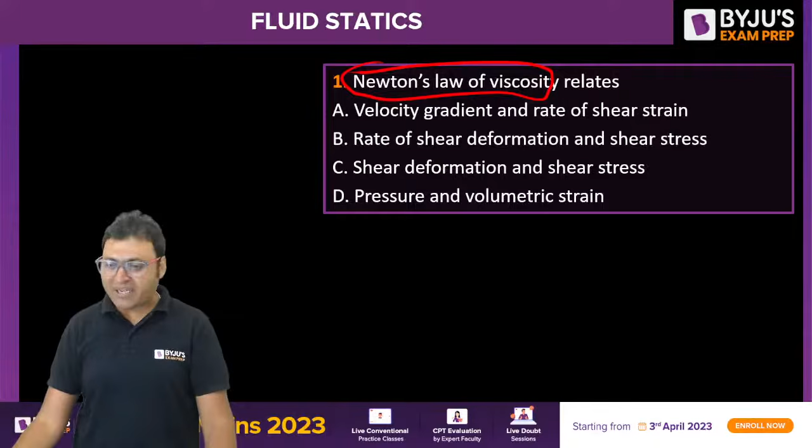Let us start with the first and the basic question from the fluid properties, Newton's law of viscosity, very important. Either there will be a numerical asked from Newton's law of viscosity, or there is a theoretical question asked from viscosity, like the unit of viscosity or how the viscosity varies with temperature. So you should understand about viscosity, a very important property of fluid.

What exactly is the expression or the statement for Newton's law of viscosity? Can anybody let me know? When we analyze the adjacent fluid particles, the relative motion of the adjacent fluid particles, we develop this expression: d theta by dt is equal to du by dy. The unit will be second inverse. Rate of angular deformation will be equal to velocity gradient.

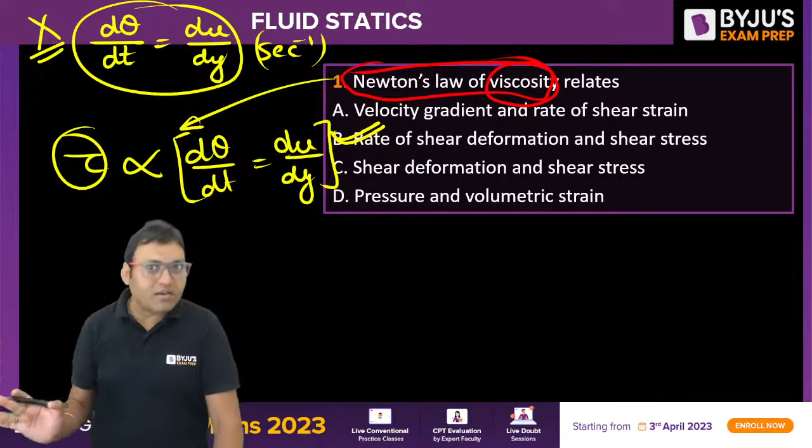According to Newton's law of viscosity, shear stress developed in the fluid is directly proportional to d theta by dt, or du by dy. Shear stress developed is directly proportional to rate of angular deformation or velocity gradient. It relates shear stress and rate of shear deformation, not velocity gradient alone. So d theta by dt equal to du by dy is not Newton's law of viscosity. Newton's law of viscosity says shear stress developed in the fluid is directly proportional to rate of angular deformation, rate of shear strain, rate of shear deformation, or velocity gradient.

If we convert it into an equation, tau can be written as mu, the proportionality constant, into d theta by dt. That is the equation form. The constant of proportionality is called the coefficient of viscosity, also called absolute viscosity, or dynamic viscosity.

What is the unit of coefficient of viscosity, absolute viscosity, or dynamic viscosity? The unit of mu will be Pascal second or Newton second per meter square, or in SI unit, kg per meter second. The dimension formula is M1 L minus 1 T minus 1.

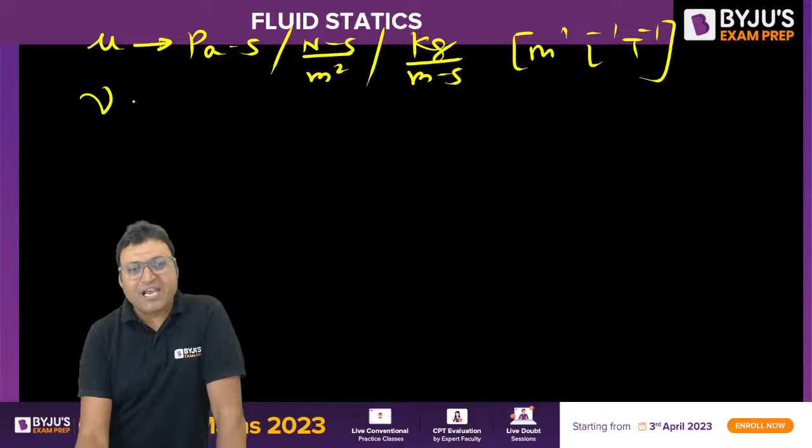There is another viscosity defined, kinematic viscosity, that is dynamic viscosity per unit density. That is called kinematic viscosity. The SI unit is meter square per second, also called momentum diffusivity. The CGS unit is stoke, or centimeter square per second. One stoke is equal to 10 to the power minus 4 meters square per second.

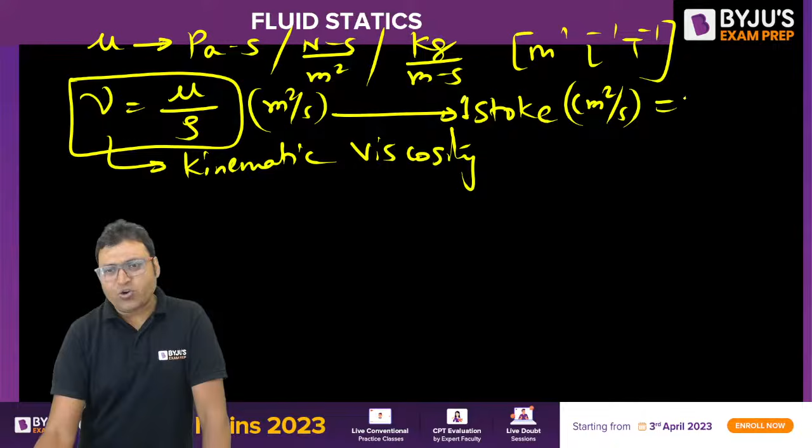The CGS unit of dynamic viscosity is dyne second per centimeter square, or gram per centimeter second, or poise. One poise will be equal to 10 to the power minus 1 Pascal second. That is how you should understand the conversion.

Do you understand it? Is this clear? Moreover, as the temperature increases, viscosity of liquid decreases because cohesive force is the dominating parameter. As the temperature increases, viscosity of gas also increases because molecular collision is the governing parameter, right?

If the velocity profile is linear, du by dy is obtained from u as a function of y. If the velocity profile is assumed to be linear, then for linear velocity profile, tau is equal to shear force per unit shear area, equal to mu into v by h, that is constant, not a function of y.

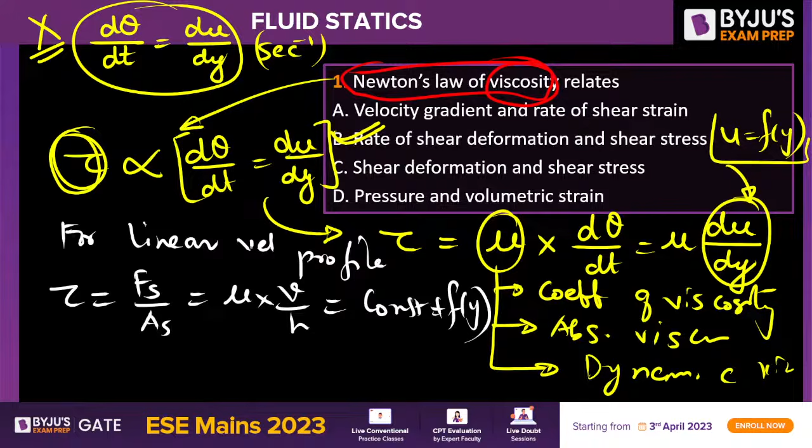Is this clear? So that is about Newton's law of viscosity, a very important property of the fluid. Let us move to the next one. There are two properties very important for your examination point of view: one is viscosity, another is surface tension.

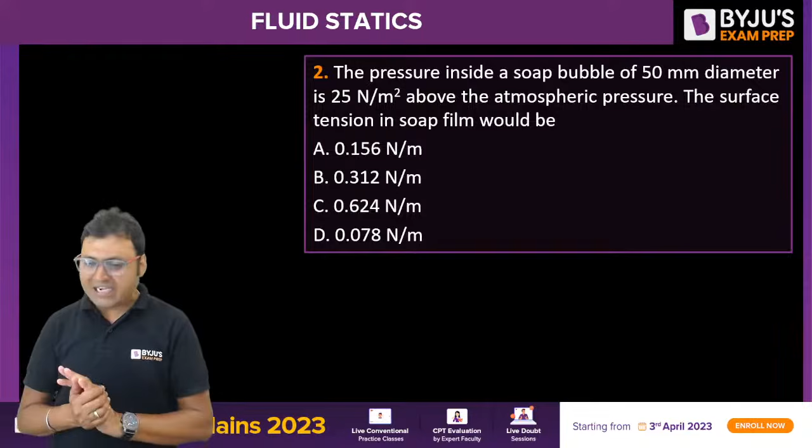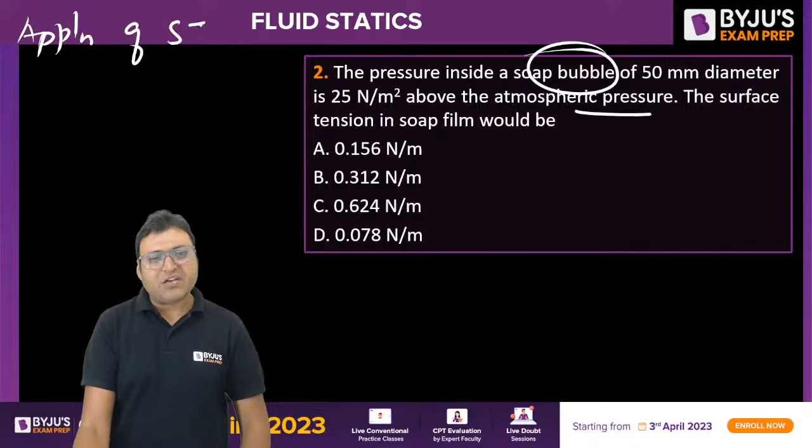The next question: the pressure inside a soap bubble of 50 mm diameter is 25 Newton per meter square above the atmospheric pressure. The surface tension in the soap film would be what? This is from the application of surface tension. We can say delta P for a liquid drop is given by 4 sigma by diameter of the drop. The shape of the drop is always spherical because of surface tension, since surface tension always minimizes the surface area of the liquid. That is also equal to delta P for an air bubble, because liquid drop and air bubble have single interfaces.

For a soap bubble, there are two interfaces. So delta P for a soap bubble is equal to 8 sigma by D, or twice of delta P for a liquid drop, because a liquid drop has one interface while a soap bubble has two. Another application: the third one is delta P for a liquid jet. The shape of the jet is cylindrical, and that comes out to be 2 sigma by D, since diameter is very small compared to the length. These are the various applications of surface tension. There is a high possibility that the question can be framed from any one of these formulas.

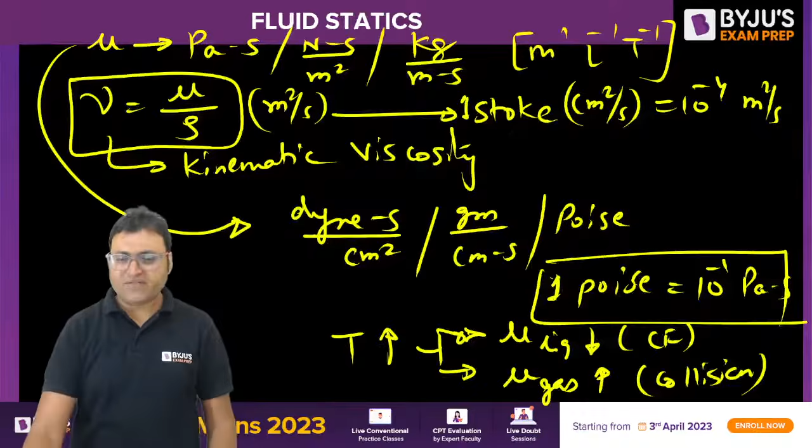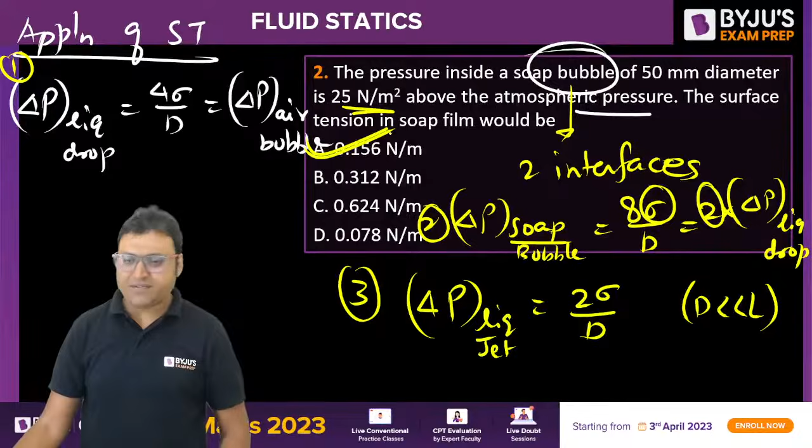Surface tension can also be defined as the amount of work required, in joule, per unit change in surface area of liquid, in meter square. So joule per meter square or Newton per meter is the unit of surface tension. The correct answer is option A. For question number 2, option A is the right answer.

The next one, question number 3 on the screen. There is an equilateral triangular plate having side B. This side is also B, and this is also B.

A surface is immersed in water as shown in the figure. The question asks for the center of pressure below the water surface at a certain depth - not the center of gravity, but the center of pressure. We need to find the depth of center of pressure from the free surface, that is HCP.

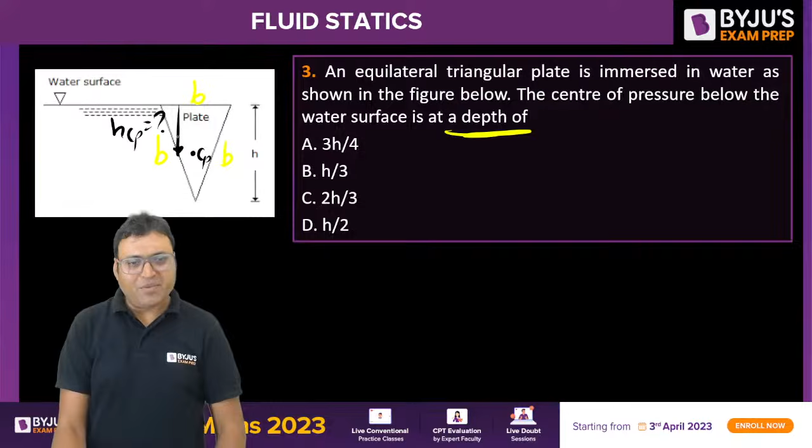What is the formula for a vertical plane surface? The formula for depth of CP is x bar plus Ig by Ax bar. Here, x bar is the depth of centroid of the plane surface from the free surface.

The value of x bar will be h by 3, where h is the height. The area is equal to half into B into H. Ig will be the moment of inertia passing through the centroidal axis parallel to the base, which is B into H cube by 36.

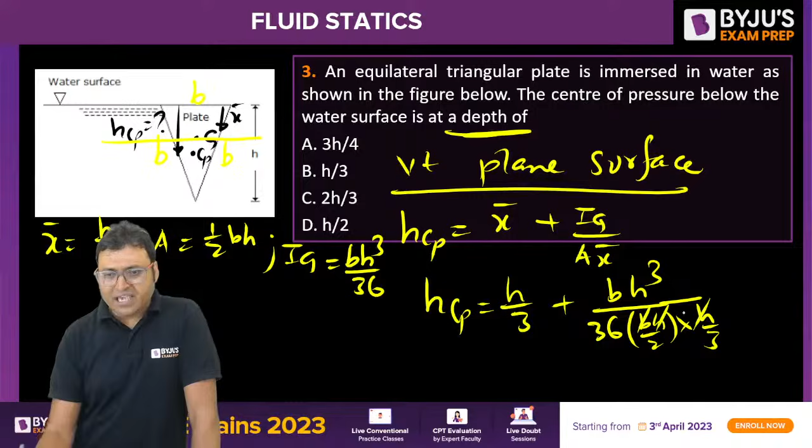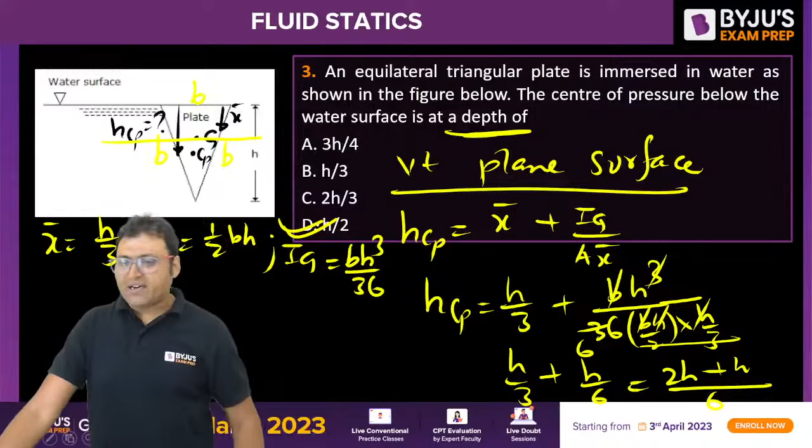Put the values and you will get the answer. HCP is equal to x bar, that is h by 3, plus BH cube by 36 into BH by 2 into h by 3. The BHH terms cancel out, leaving h by 3 plus h by 6, which gives 2h plus h over 6, that is 3h by 6, or h by 2. So h by 2 is the right answer - option D is correct.

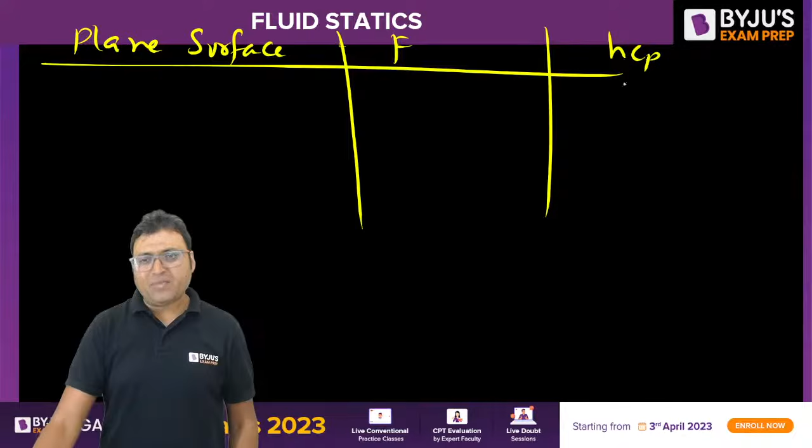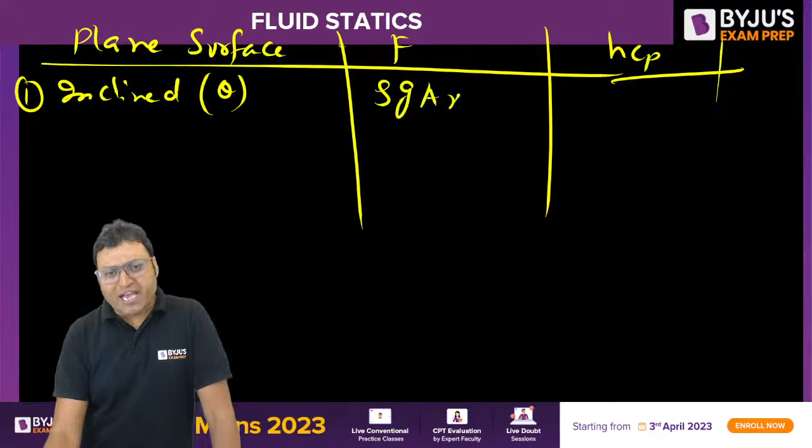We can also find the hydrostatic force for a plane surface - both the hydrostatic force and the depth of CP. If it is an inclined plane surface and theta is the angle of the inclined surface with horizontal, the formula for force is rho g A x bar, and HCP is x bar plus Ig by Ax bar sine square theta.

For a vertical surface, theta will be equal to 90 degrees. This formula remains the same, but when theta becomes 90 degrees, sine theta becomes 1, so x bar plus Ig by Ax bar will be the expression for depth of CP.

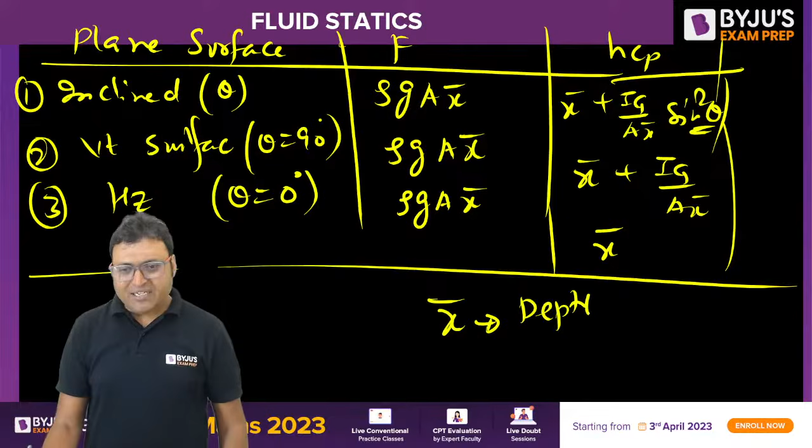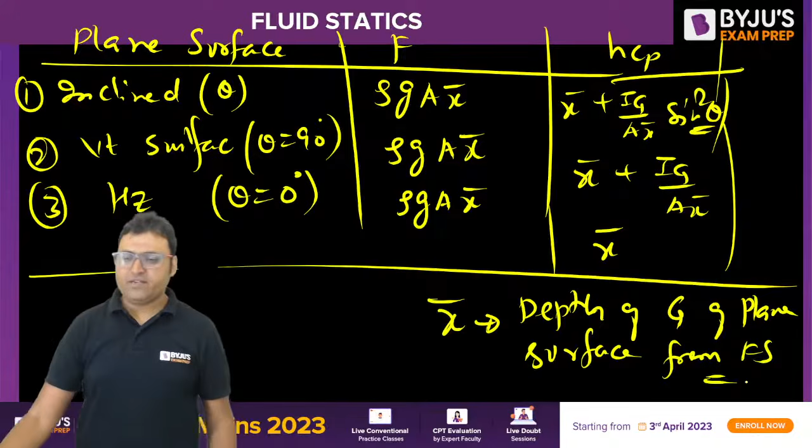If it is a horizontal surface, theta will be 0 degrees and the formula remains rho g A x bar. When theta becomes 0 degrees, sine theta will be 0, so HCP is equal to x bar. For different orientations of the plane surface, these formulas must be memorized - x bar is the depth of centroid of the plane surface from the free surface of the liquid. Let us move to the next one.

Question number 4: the vertical component of force on a curved surface submerged in a static liquid is equal to what? What is the correct answer?

For a curved surface, let us say this is the free surface and the liquid is like this. To find the vertical component, the weight of the fluid which can be contained by the curve up to the free surface gives the magnitude of Fv, and the direction is decided by the actual contact.

If the liquid is in contact from the top, the direction will be downward. If the liquid is in contact from the bottom, the direction will be upward. So it is always the weight of the fluid - rho of fluid into g into volume of the fluid which can be contained by the curve up to the free surface is the vertical component.

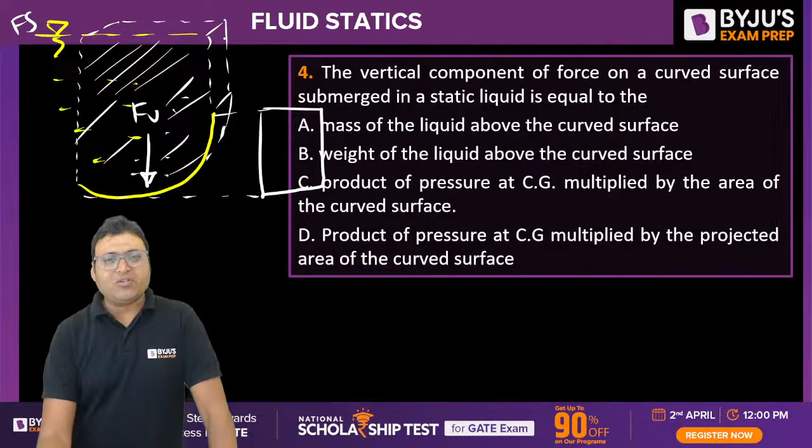How do we find the horizontal component? Take the vertical projection of the curve. Once you take the vertical projection, it can be treated as a vertical plane surface, and apply the formula rho g A x bar for the magnitude of force. The depth of CP can also be found using the formula x bar plus Ig by Ax bar.

So that is how the horizontal component is calculated separately using the vertical projection of the curve, while the vertical component is calculated in a different manner by imagining how much fluid the curve can contain up to the free surface.

The weight of the fluid which can be contained by the curve up to the free surface will be the magnitude of Fv, and the direction of Fv will be decided by actual contact. For example, if there is a curve and the liquid is on the right hand side, here is the free surface.

If we want to find out the vertical component on this curve, we will always imagine how much fluid it can contain up to the free surface. The magnitude will be decided by this volume, not the volume below the curve, into rho fluid into G, and the direction will be upward, because the actual fluid is in contact from the bottom.

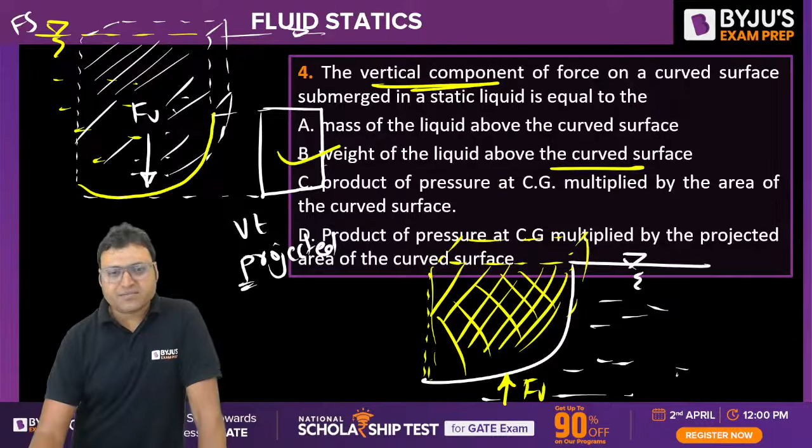So the answer to this question, the vertical component, is the weight of the liquid above the curved surface. B is the right answer. Yes, Tarun, well done, good, good.

The next one, find out the answer to the next question. A metal ball which weighs 9 kilonewton in air and 7.5 kilonewton in a fluid of specific gravity 0.75 — then what will be the specific gravity of the ball material?

When a body is immersed in a fluid, there is a downward force, that is the actual weight acting. Along with that, there is a buoyant force acted by the fluid in the upward direction. So we can say the apparent weight of the body is equal to actual weight minus buoyant force. That is called the apparent weight of the body submerged in the fluid.

The first fluid is air, the second fluid has a specific gravity of 0.75. So we can say actual weight minus buoyant force by air. Good morning, Amit, welcome. Actual weight of the ball minus buoyant force by air is equal to 9 kilonewton, do you agree?

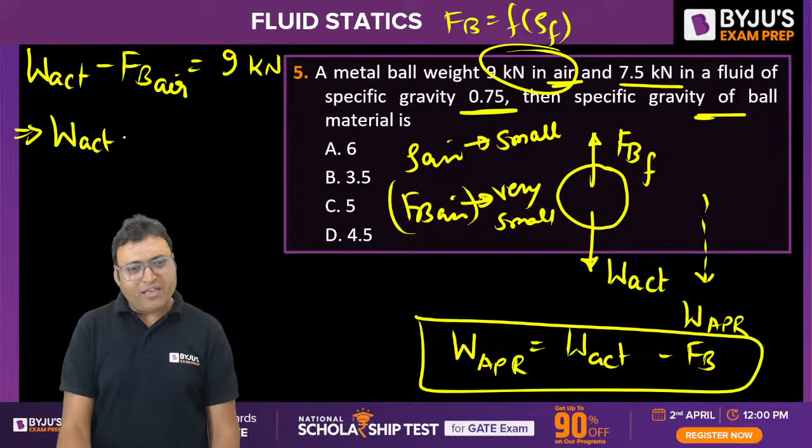Because the buoyant force is a function of density of the fluid, and density of air is very, very small, we can ignore the buoyant force by air. So we can say the actual weight of the body, that is density of the ball into G into volume of the ball, is equal to 9 kilonewton.

But for the other fluid, apparent weight equals actual weight minus buoyant force by the fluid, which is equal to 7.5 kilonewton. What is the buoyant force by the fluid? It will be equal to rho fluid into G into volume of the body, because it is completely submerged: 9 minus 7.5, that is 1.5 kilonewton.

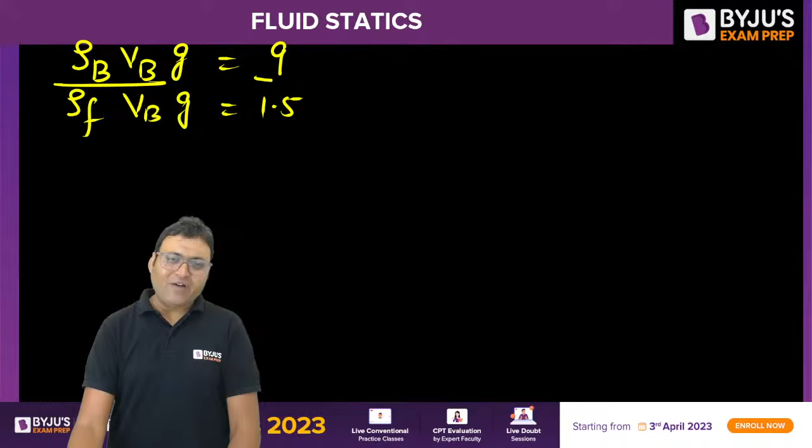So if we simplify this: density of the body into volume of the body into G is equal to 9 kilonewton, and density of the fluid into volume of the body into G, that is the buoyant force, is equal to 1.5 kilonewton. If we divide these two, the volume and G get cancelled out, so that is equal to 6 — density of the body is 6 times the density of the fluid.

If we divide both sides by density of water, what is that ratio of density of body to density of water? That will be the specific gravity of the body equal to 6 times the specific gravity of the fluid, which is 0.75. So the specific gravity of the body will be 4.5.

What is the specific gravity of the body? That is 4.5. According to Archimedes' principle, the buoyant force exerted by the fluid on an immersed body is equal to the weight of the fluid displaced by the body, and it always acts in the upward direction.

That is the concept. Here the weight of the body is greater than the buoyant force, that is why there is an apparent downward force, or apparent weight, acting in the downward direction. For the condition of equilibrium of a body, the actual weight should be equal to the buoyant force — then the body will be in vertical equilibrium. But here the body is not in vertical equilibrium; the weight of the body is greater than the buoyant force.

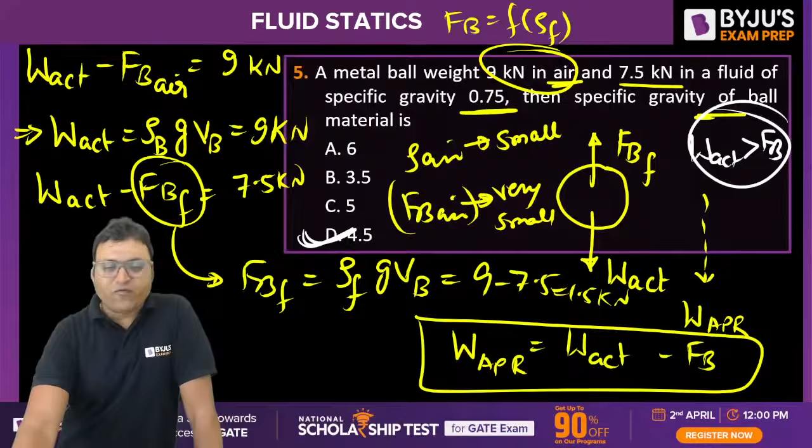That is why the body has a tendency to move in the downward direction, and that is why there is a reading on the weighing machine. If the actual weight is equal to the buoyant force, the reading of the weighing machine will become zero. The next question.

The next one, question number 6 on your screen.

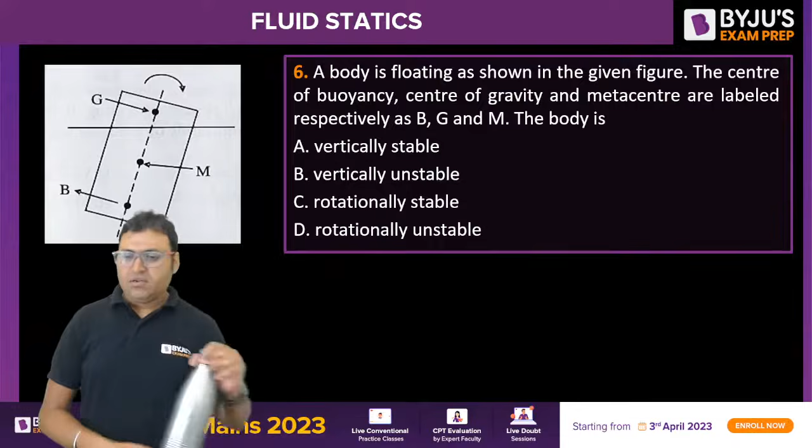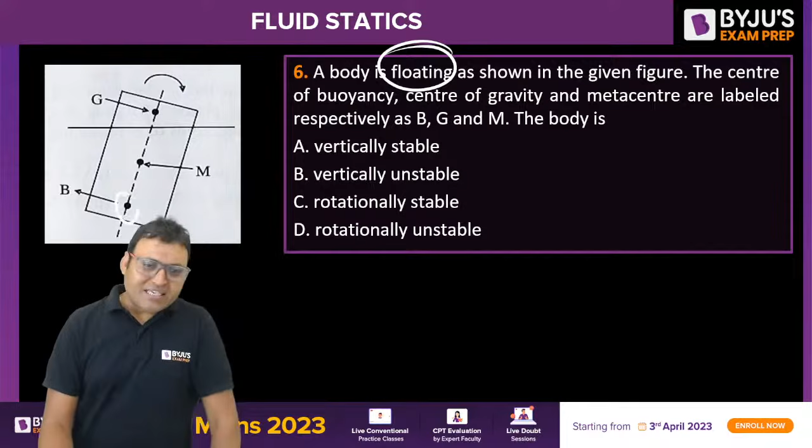Can you find out the answer for question number 6? A body is floating as shown in figure. The center of buoyancy, center of gravity, and meta center are labeled. Center of buoyancy is lying at the bottom, then meta center, then center of gravity.

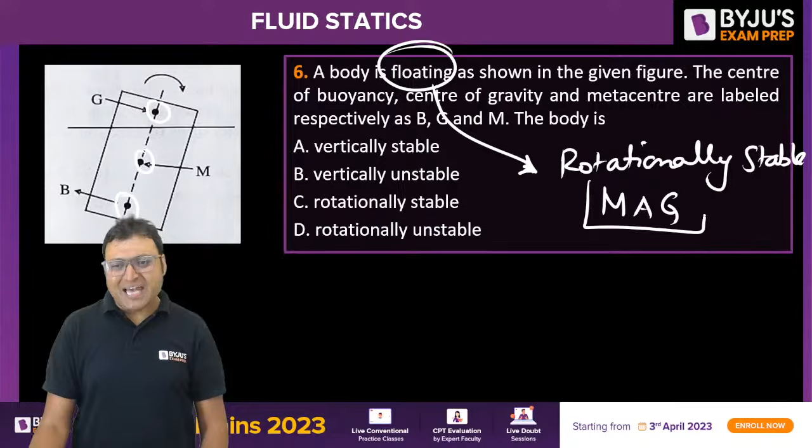The body will be in... For a floating body to be rotationally stable, meta center must lie above center of gravity. If the meta center is lying below center of gravity, it is rotationally unstable.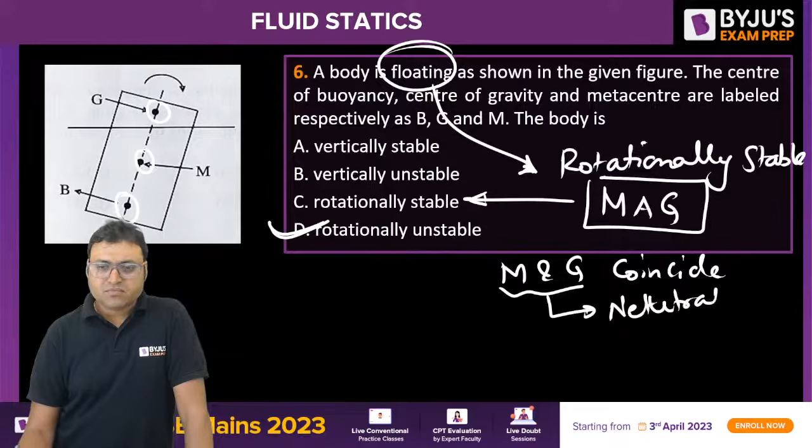And if M and G coincide with each other, then it is neutral equilibrium. That is for a floating body like a ship. Ship is an example of a floating body.

For a completely submerged body, it will be rotationally stable if center of buoyancy is lying above center of gravity. If center of buoyancy is lying above center of gravity, then the completely submerged body, like a submarine, will be rotationally stable.

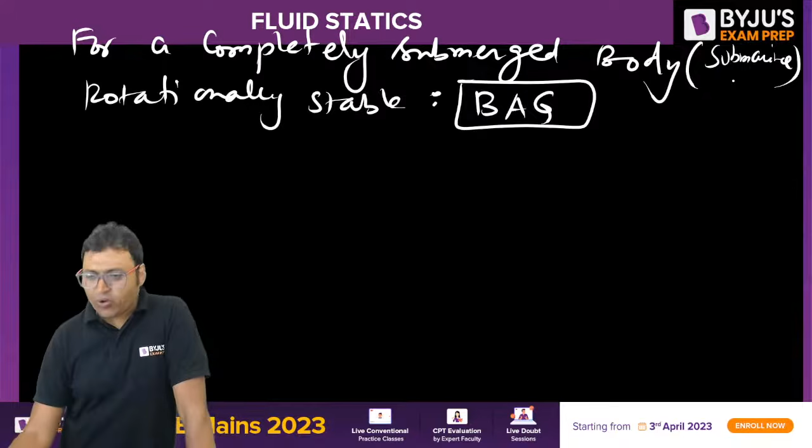So you should remember this short trick: BAG. B means center of buoyancy, A for above, G for center of gravity. If center of buoyancy is lying above center of gravity, the completely submerged body will be rotationally stable. And for partially submerged or floating body, MAG is the short trick: meta center must lie above center of gravity.

Now, can you let me know, for a floating body, is there any possibility that G lies below B, or G coincides with B? For a floating body, can there be a possibility that center of buoyancy lies above center of gravity, or center of buoyancy coincides with center of gravity?

When this happens, the floating body is always rotationally stable. In those situations, the floating body will always be rotationally stable.

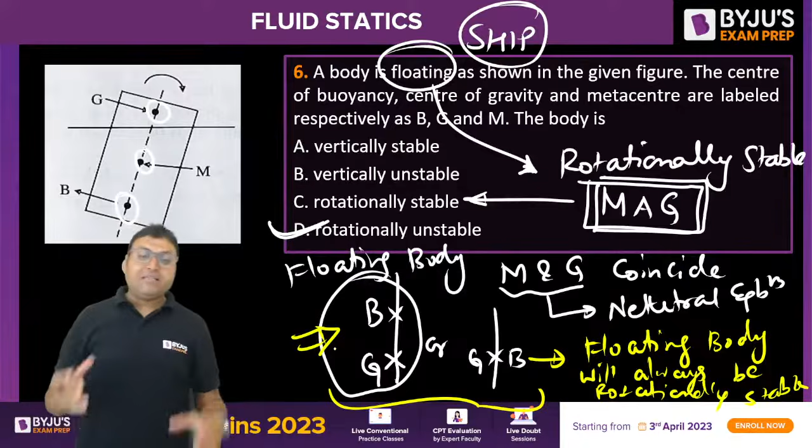So many students think that B cannot lie above G, that B is always lying below G. That is not true. There is a possibility in case of a floating body that center of buoyancy can lie above center of gravity also, or center of buoyancy can coincide with center of gravity also.

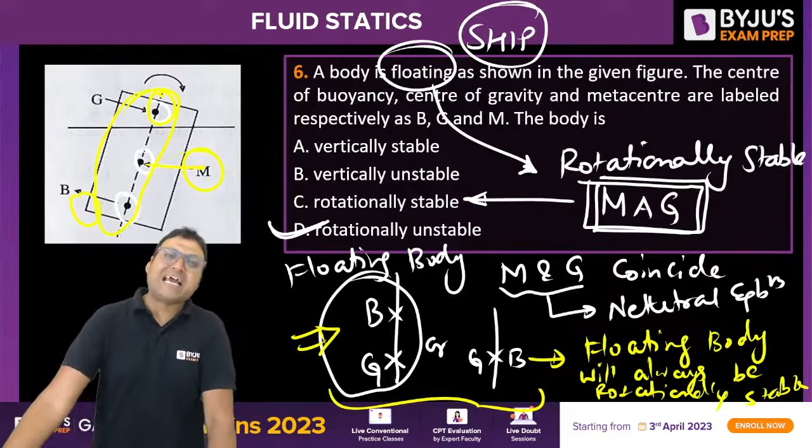In both these cases, meta center has nothing to do with it; the floating body will always be rotationally stable. But when B is lying below G, then the location of meta center becomes important to decide the stability of a floating body. I hope this is clear.

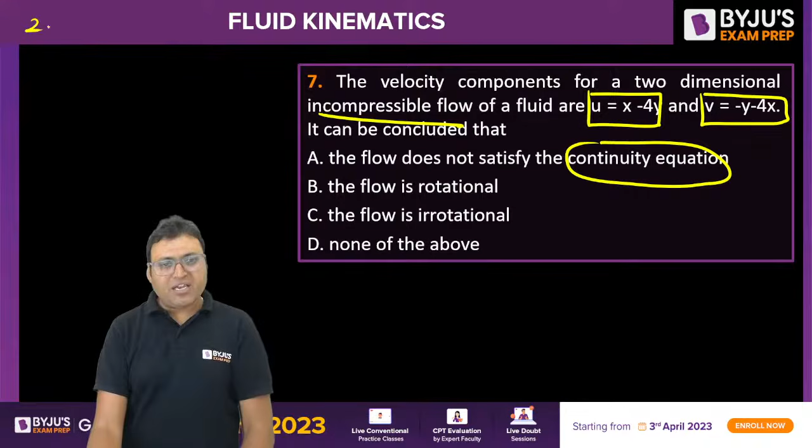What is the continuity equation for two-dimensional incompressible flow? You should remember this equation, because once the continuity equation is satisfied, then only the flow is possible. Without the continuity equation, flow cannot be possible. So the continuity equation says del u by del x plus del v by del y is equal to 0.

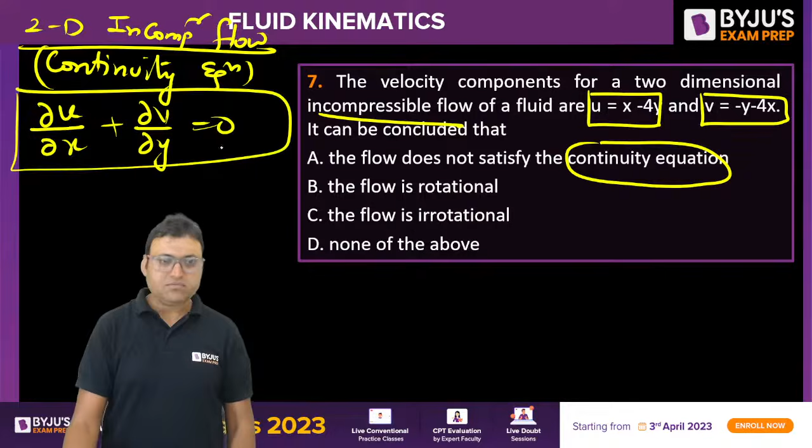So if you see the LHS, what is del u by del x? Del u by del x is equal to 1. What is del v by del y? That is minus 1, del v by del y. So it is 1 plus minus 1, that is equal to 0, RHS. It means it is satisfying the continuity equation.

The flow is satisfying the continuity equation. The flow can be possible only when it satisfies the continuity equation. Otherwise, the flow cannot be possible.

Whether the flow is rotational or irrotational: we define the angular velocity omega about the z axis as equal to half into del v by del x minus del u by del y. This is the expression for angular velocity, and this is the expression for continuity equation.

So what is del v by del x? Del v by del x is minus 4. What is del u by del y? That is minus 4. Both are minus 4. So it is half of that, minus 4 minus minus 4. Are you getting it as 0? It means irrotational flow. If the angular velocity is 0, it's irrotational flow. The flow is irrotational. C is the answer.

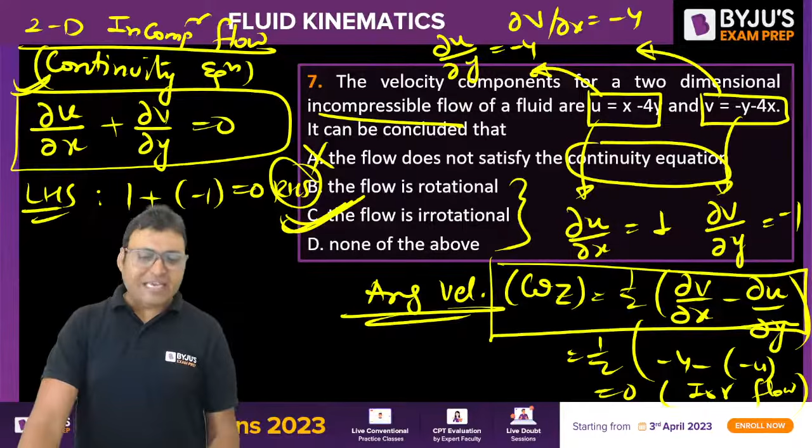You should memorize these formulas. The session is to brush up or revise your formulas. Questions are not tough, but formula revision is important before going to appear for your actual examination.

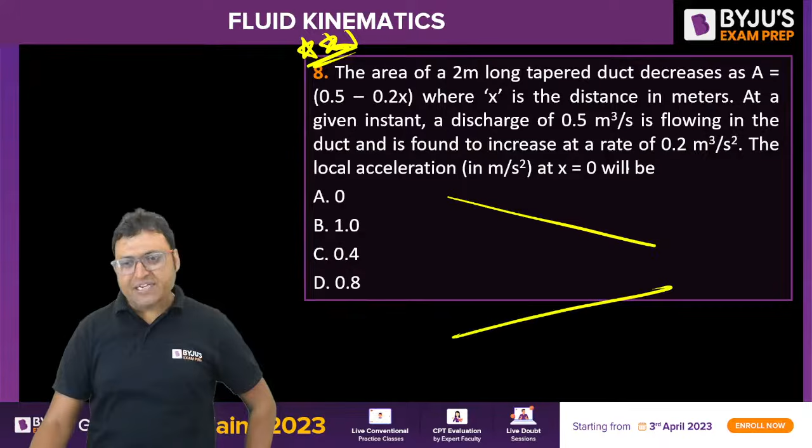The next one, question number 8 on your screen. The area of a 2-meter long tapered duct decreases. Area is decreasing, it is like a nozzle. This is the change in area, this is how the area decreases, where x is the distance in meters. Inlet is at x is equal to 0, and this is x is equal to L. The flow is in x direction.

At a given instant, a discharge of 0.5 meter cube per second is flowing in the duct and is found to increase at a certain rate. What is this, dq by dt? Rate of change of discharge is 0.2 meter cube per second square.

The local acceleration at x is equal to 0 is to be found. Can you solve it? Can you get me the answer for this? Now, at any section...

Can you let me know whether the flow is steady or unsteady? The flow is unsteady, because q is a function of time. So it's unsteady flow. And the flow is non-uniform also, because velocity is a function of space also. So there is a local acceleration, and there is also a convective acceleration. The flow is unsteady and non-uniform, so convective acceleration will also be non-zero.

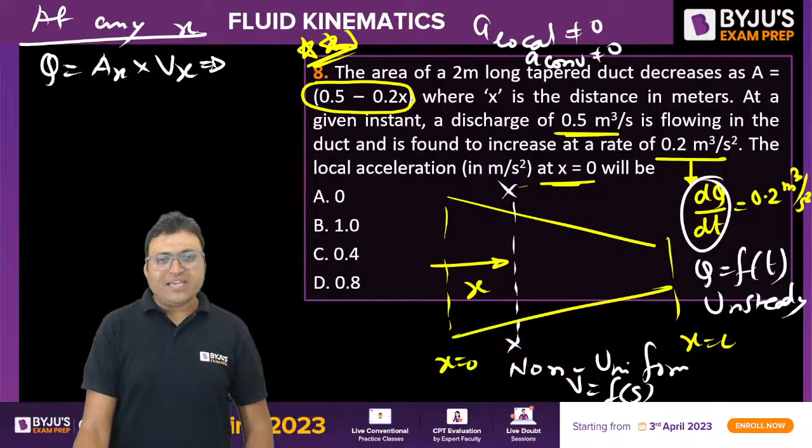So at any x, and at any instant, we can say q is equal to area into velocity, or vx is equal to q by ax. Now if we find out the local acceleration at this x, that is del vx by del t. And what is vx? Del by del t of q by ax. Area is independent of time, so that can be written as 1 upon ax into del q by del t. That is the expression for local acceleration.

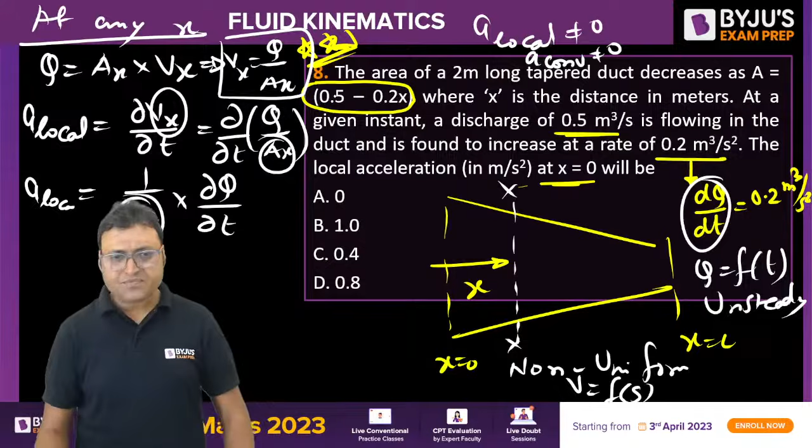Put the value of a. What is del q by del t? That is 0.2. So the local acceleration at any x is given by 1 upon (0.5 minus 0.2x) into 0.2. Now if we want to find the value at x is equal to 0, then the local acceleration will be 0.2 divided by 0.5, that is 0.4 meter per second square.

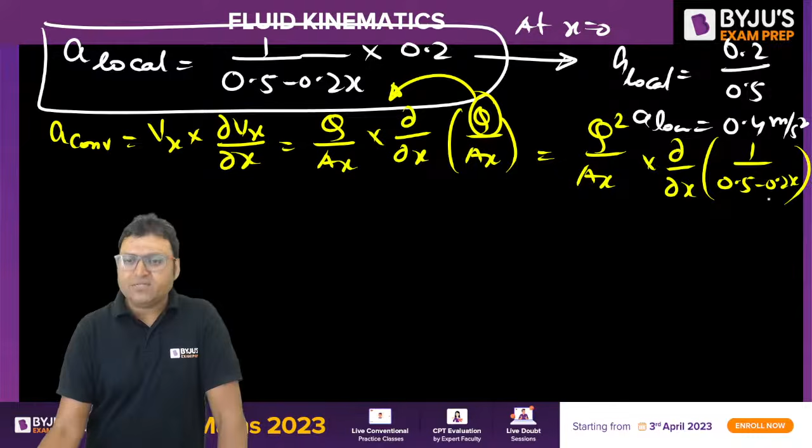Can you find out the convective acceleration at the same location? Convective acceleration is given by Vx into del Vx by del x. Vx can be written as q by ax into del by del x. q can be taken outside because it is not a function of x. So it will be q square by ax into del by del x of 1 upon (0.5 minus 0.2x). Do the differentiation, so it is q square.

Q is 0.5, so it will be 0.5 square upon ax into minus 1 into (0.5 minus 0.2x) to the power minus 2, into minus 0.2. And this is nothing but ax only. So it becomes 0.5 square into 0.2 upon (0.5 minus 0.2x) cube. This will be the expression for convective acceleration.

And at x is equal to 0, it will be 0.5 square into 0.2 upon 0.5 cube. What is the answer? This gets cancelled out, so again it will be 0.2 by 0.5, that is 0.4.

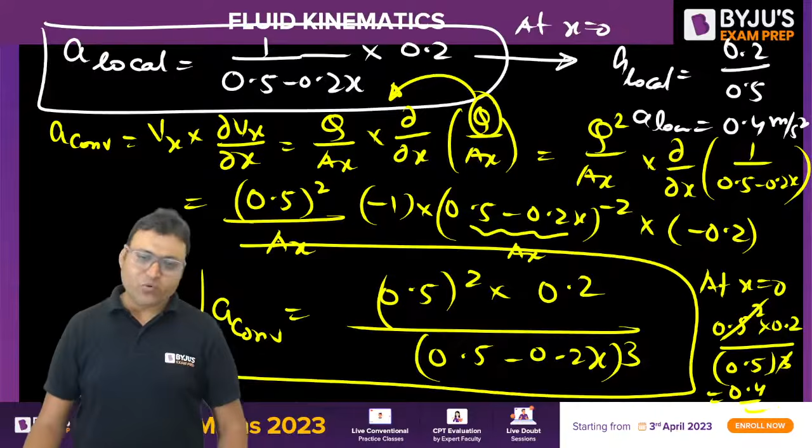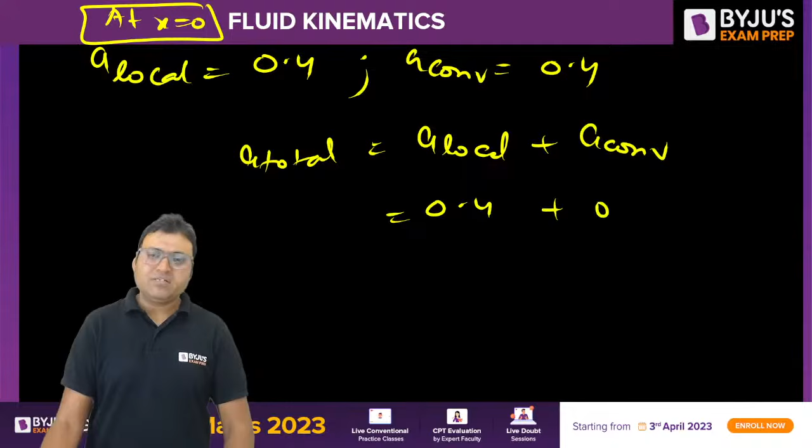So convective acceleration at x is equal to 0 is also 0.4. I hope this is clear. Local acceleration is 0.4, convective acceleration is also 0.4. So the total acceleration is equal to local plus convective, that is 0.4 plus 0.4, that is 0.8 meter per second square. That is the total acceleration of the fluid.

Second last question for the day. Again from kinematics, the streamline equation passing through the point (2, 3) will be...

Amit, you should continue your preparation. If your preparation is up to the mark or you need a slight push, you should not leave it in the middle. You should continue your preparation. You will get selected. Give it one more chance, and even if you are not able to make it, you can take admission in MTech. But since you are already in the preparation journey, you should not leave it in the middle.

The streamline equation passing through point 2, 3 will be found. We will start with the differential equation of a streamline. What is the differential equation of a streamline? dy by dx is equal to v by u, which we can call the slope of a streamline.

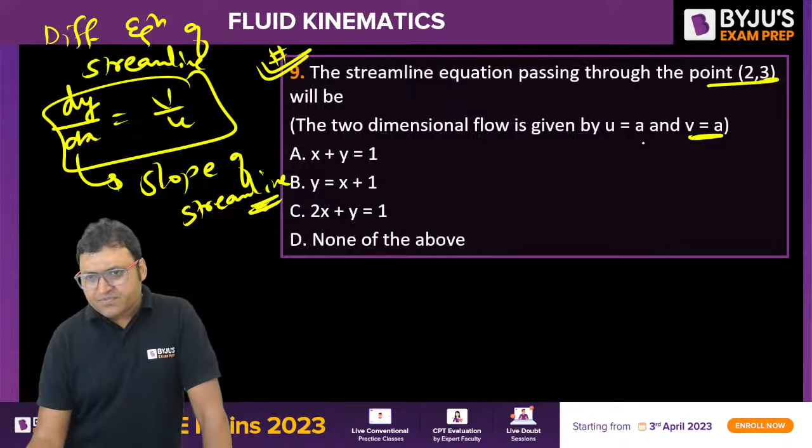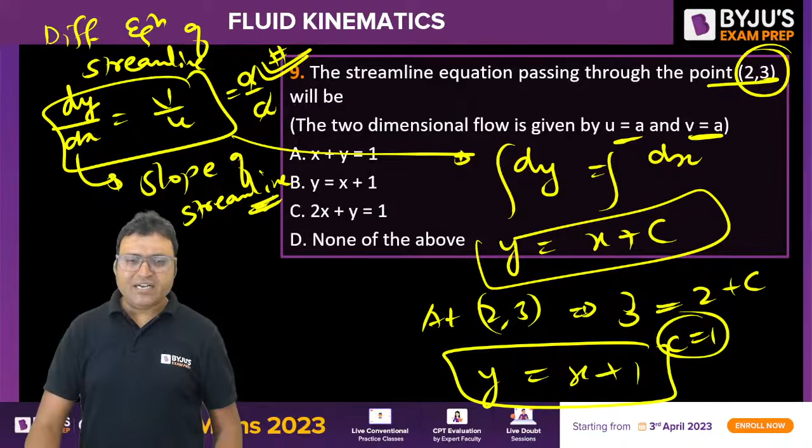Slope of a streamline. So what is the value of v? V is equal to a. U is also a, so we can say it is a by a, that is 1. So from here, dy is equal to dx. If we integrate, y is equal to x plus c. To find the value of c, we put the point 2, 3: y is equal to 3, x is equal to 2 plus c, so c is equal to 1. So y is equal to x plus 1 is the equation of the streamline.

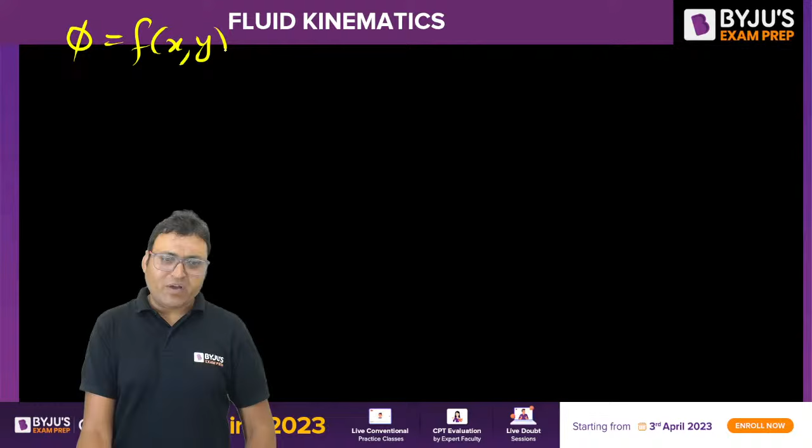Can you find out phi as a function of x and y for psi is equal to x square minus y square? For the given stream function, can you find the corresponding velocity potential function?

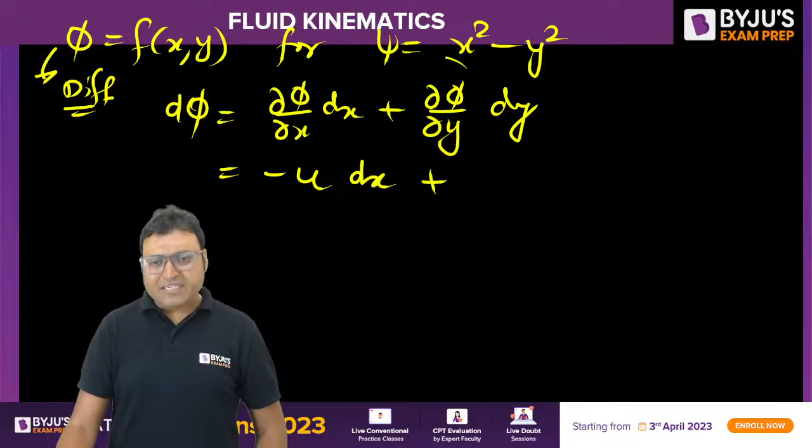If we differentiate this, we can say d phi is equal to del phi by del x into dx plus del phi by del y into dy. So del phi by del x is equal to minus u into dx plus del phi by del y is equal to minus v into dy, isn't it? U is equal to minus del phi by del x, v is equal to minus del phi by del y. Put the value of u and v.

So d phi: u is equal to minus 2y, so it is 2y dx, plus v is equal to minus 2x, so it is plus 2x dy. If we integrate this, phi is equal to 2y into x plus 2x into y, that is 4xy. Phi will be given by 4xy, which is the corresponding velocity potential function for the given stream function.

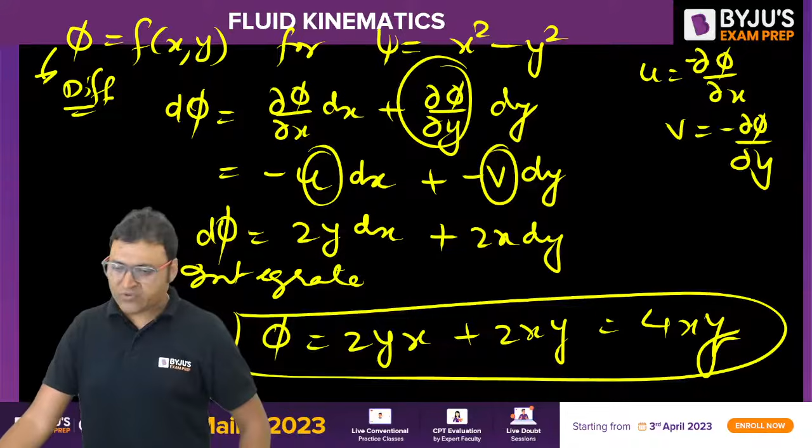Is this clear? That is all from my side for this session. Tomorrow we will be having the numerical practice session for fluid dynamics. I have covered fluid kinematics in today's session. Tomorrow we will be having the numerical practice for formula revision for fluid mechanics part 2, that is dynamics, ideal flow as well as real flow.